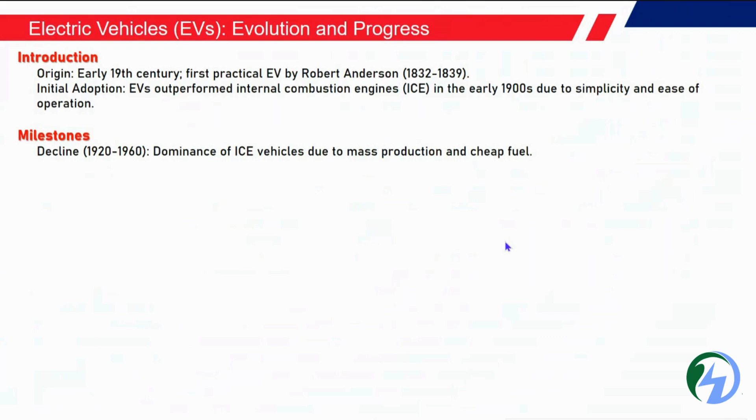It was very difficult for battery convention, and most of the investors invested their money on IC engines, the internal combustion engines, which work with fuel, the petrol and diesel combination. Later, the batteries required more and more lithium ion batteries and some nickel NiMH batteries, used for recharging.

They integrated those batteries in later stages, and some companies like Tesla made their model from 2008 to 2020, a complete EV vehicle.

It was introduced currently, and now all companies are working towards solid state batteries, because batteries are coming with solid and liquid criteria.

So how this battery's life can be expanded, and how this performance can be added to the vehicles, and how the power should be reutilized when we do acceleration or braking - it's about regenerative braking.

Currently, the companies are working on EVs. By 2030, the expected 60% should be EV vehicles, with Tesla, BYD, Nissan, and VW. Some companies started working more on EV production, and future perspective on EVs.

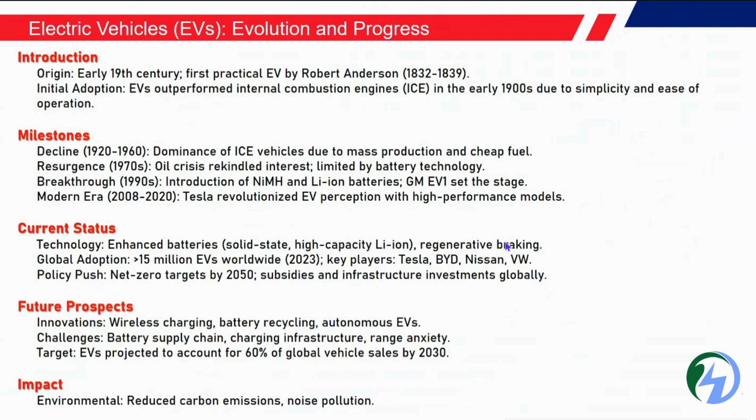And the impact of this EV will be environmental effects, like more carbon emission will be reduced and noise pollution also will be reduced once we start the EV vehicle.

And it will create good opportunities for many people, where they can work in the manufacturing area and some of the renewable energies.

So what exactly does the EV battery have inside? As I told you, the batteries have some lithium ion chemicals. Usually it will be having the lithium metal oxide, with cobalt or nickel, manganese, iron, or any other substance. It will be part of the cathode.

It will be protected with the electrolyte, covered with aluminum foil, and we have an anode, the graphite rod. The cathode and anode are separated by the plastic separator, and to protect the anode we have the copper foil. So these are the five layers where the battery will be manufactured and placed in the vehicles to make it rechargeable.

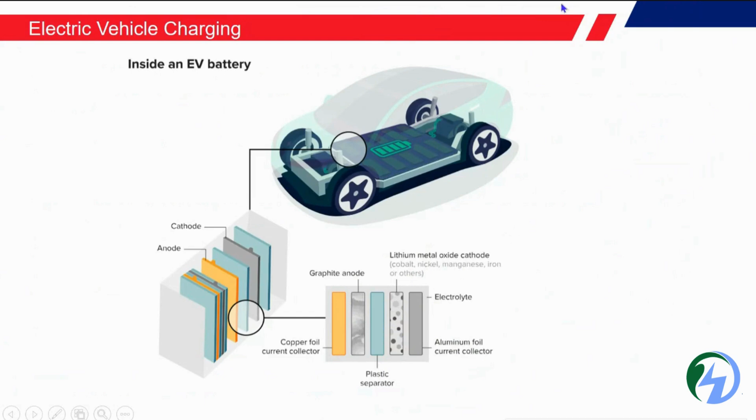And how do these vehicles recharge? Usually they have charging stations, so the vehicles will be charged from the station point.

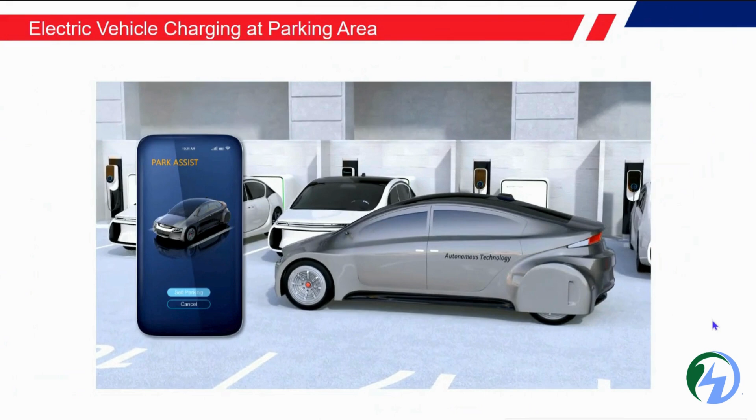And some of the areas have parking slot areas, so that it's able to monitor and observe via the mobile, how the vehicle is able to park automatically and charge. It will be a part of wireless charging, how it will be charged without wire, so that will be monitored from the mobile app. So those are some of the future technologies, whether it will be wired or wireless, so that can be tracked from the mobile.

And some of the renewable energies which play a major role are the solar system or wind panels, because the power is one main concern to charge the batteries. It should be supplied from the source. So like the natural sources, it will give a good result for the EV charging, where this will help us to charge the vehicles from the different stations.

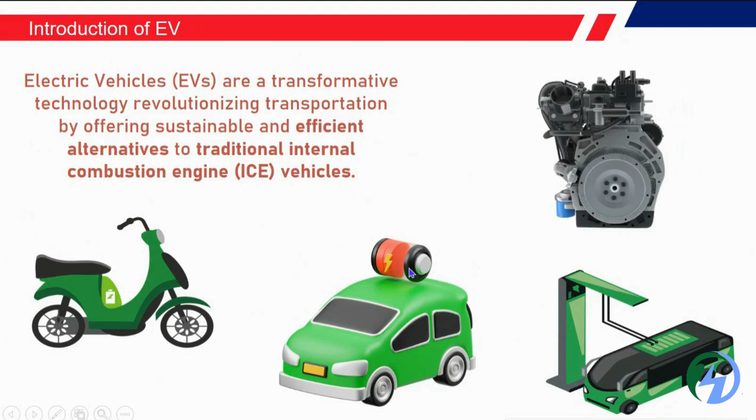So the battery always requires charging, and that will be a part of a rechargeable battery, where the power will be stored in the batteries and distributed to the wheels. So the battery is the one which will be placed as a part of the vehicle. We make it as battery packs, and this battery pack helps to drive the motors.

So we have the front traction motor, and we have the inverter, which converts AC to DC or DC to AC, depending upon the motor we use. And similarly, we have a rear traction motor with the power electronics, meaning the inverter. So we have the motor and inverter on both sides, and the battery, inverters, and motors play a major role in driving the EV.

And what is the EV powertrain? Usually the EV powertrain talks about how the power is distributed to the wheels. Here we can understand this with a car vehicle, which has four wheels. The four wheels are one part, connected to the mechanical transmission, which will be a differential.

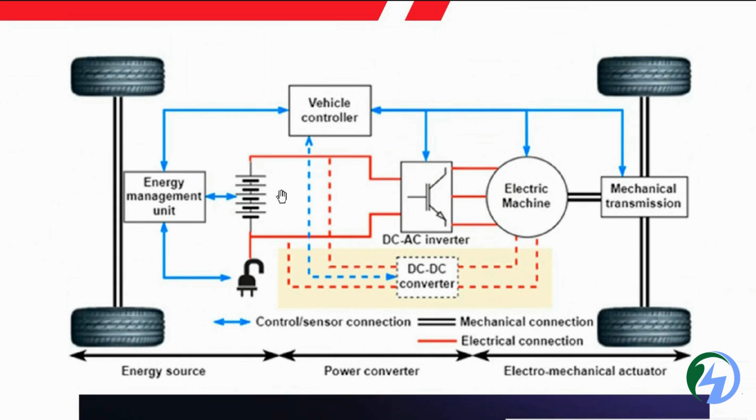The double line talks about the mechanical connection, whether the drive shaft or shaft connection, and how it is established towards the front wheels or back wheel, or towards the transmission of the drive. The red line talks about the electrical connections from the batteries and from the inverters on the electrical transmission.

So this is an overview to understand the powertrain. The batteries, inverter, and motor play a major role. EVs are mostly configured with batteries and some other fuel cells. The powertrain converts the electrical energy into mechanical energy.

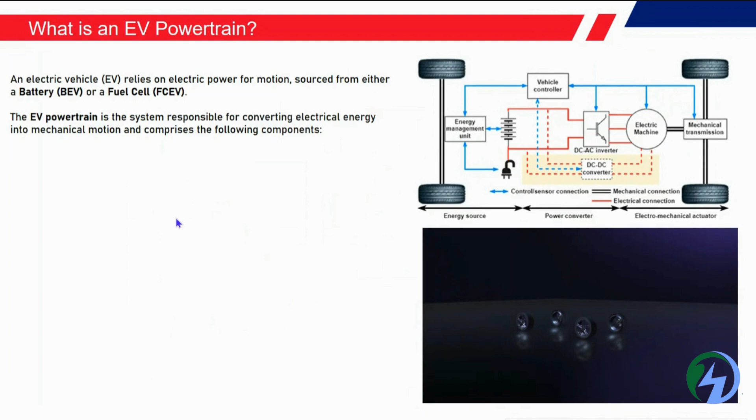The energy stored in the battery is distributed to the inverters and converters, and that energy flows to the motor. The motor converts the electrical energy to mechanical motion, which is transmitted to the wheels, generating movement.

Next are the key features to drive this. Mainly, we have the drive shaft, which helps drive the wheels from the shaft. As we know, the EV has zero emission during operation, whenever the transmission is happening from the batteries to the wheels.

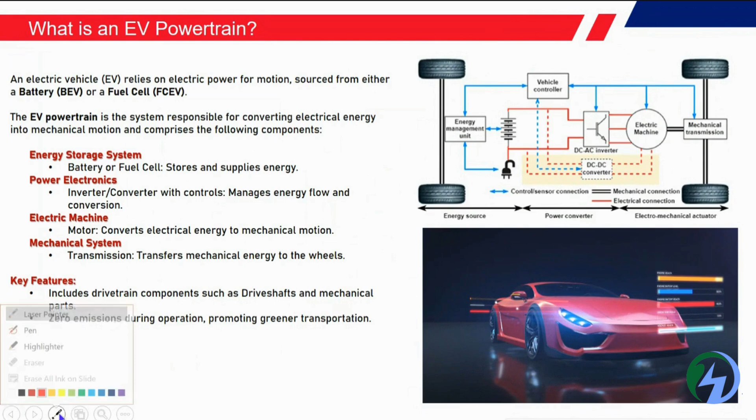All together, it will be integrated, and the powertrain works as a system. The major components are the battery pack, inverter, electric motor, and gearbox, which is required to change the set of speeds.

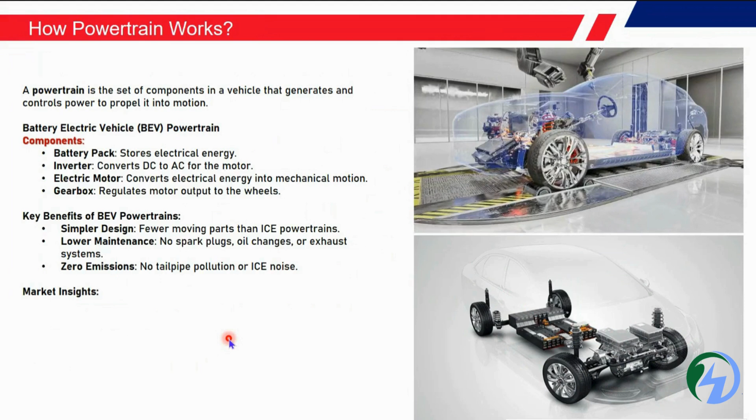Other benefits are a simple design, lower maintenance, and zero emission. As for market insight, 70% of global electric cars will be in use by 2023, and 98% of electric light commercial vehicles are moving towards EVs, resulting in good sales and market purchasing, because maintaining petrol and diesel vehicles gives pollution.

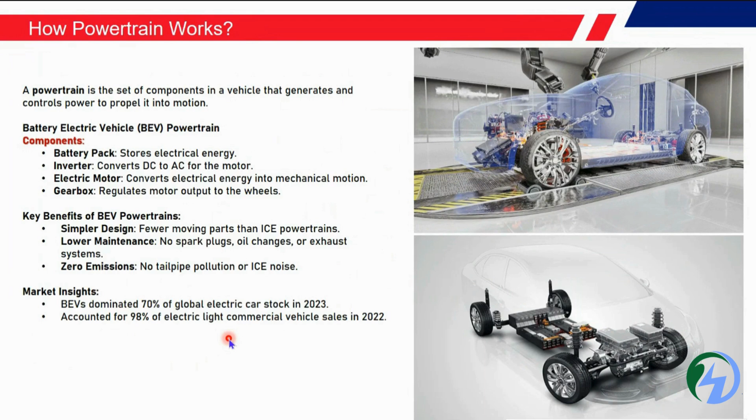This is impacting the industry, and EV charging can happen at home and in some charging stations, where it can save fuel consumption money, and the pollution won't be affected. So even IC engines are being replaced with batteries in coming days.

So why these powertrain designs? As we know, whenever we place the batteries and hardware components in the car, heating is a factor. To reduce the heat, we require some cooling, so we introduce fan components, because when vehicles run long distances, they can heat up, and performance will be reduced for the hardware or battery.

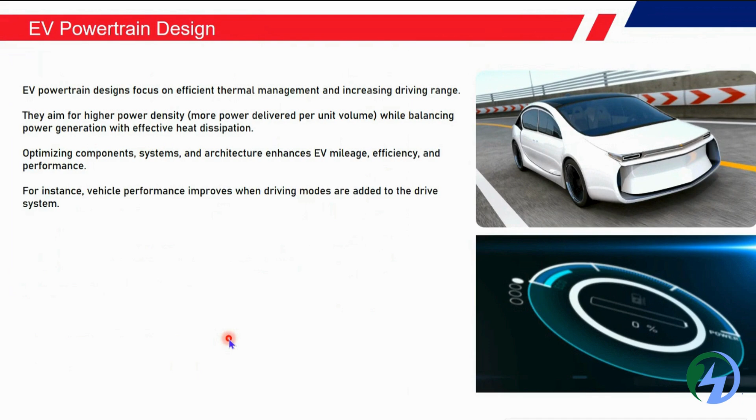To maintain good mileage and efficiency for long runs, the design towards the EV is very essential, to give good performance. It should always have a proper output when delivering towards speed and mileage, and it should have a proper response.

The functionality, whether software or hardware, should have accurate response and accurate driving results towards the battery or inverter. For future mileage, whether short or long duration, we should disable some features, because whenever certain features are not required, battery power consumption will increase more and more. So it should be avoided.

There are some enabling conditions where switches should be turned off during certain runs, so that battery power consumption is maintained efficiently during vehicle driving, and how this power will be distributed from the battery.

So mainly the power will be distributed to the motor, to the inverters, and that two inverters, like we should convert the DC to AC inverter, that will be the traction inverter. And next we have the DC to DC converter. It will convert the high voltage DC from the battery to the low voltage DC.

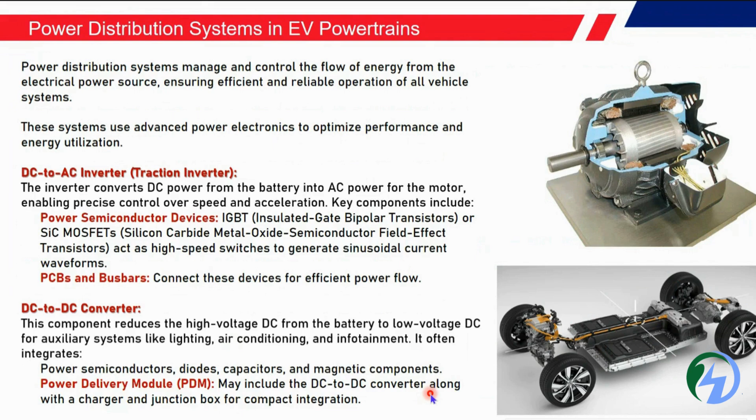And some of the vehicle control unit, like the vehicle control unit, acts as a brain, because it will coordinate with the sensors and other auxiliary modules to support. And we have a power distribution unit, the PDU, where it is connected to the switches, fuses, relays and semiconductors.

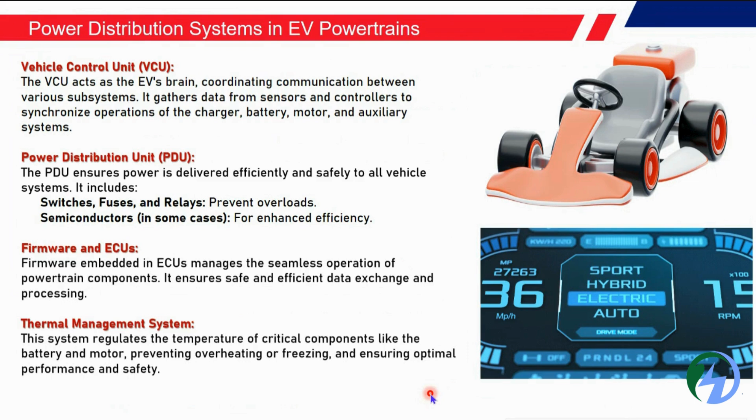Moreover, the firmware and ECUs will be part of the other ECUs where data is exchanged. And thermal management is needed because the hardware we are equipped with will get heated up. To cool this, we require the thermal management system to cool the complete batteries and hardware in the vehicle.

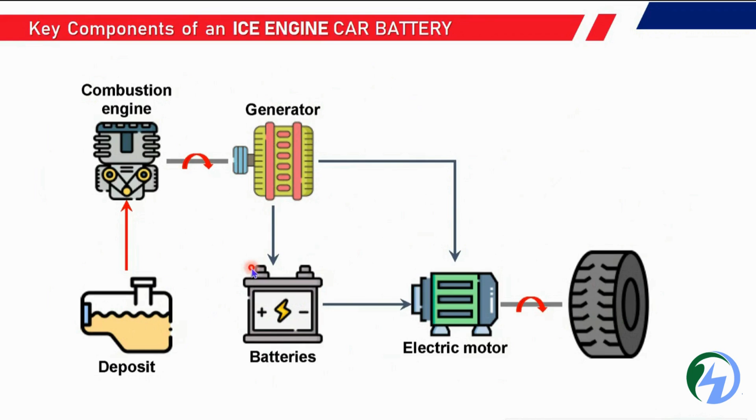The generator will supply power to the electric motor and to the batteries. So for the electric motor, sometimes we require power from the generator, and alternatively we require it from the battery, and that will rotate the wheels. So generally, this is high level information on how the IC engine has car batteries and how charging and discharging happens.

And similarly, how the electric vehicle works - all of this is based upon charging the battery. When you plug the charging plug into the car, it will be charged, and then it will be stored in the battery as DC power. Once you start the vehicle, the car system will be powered on.

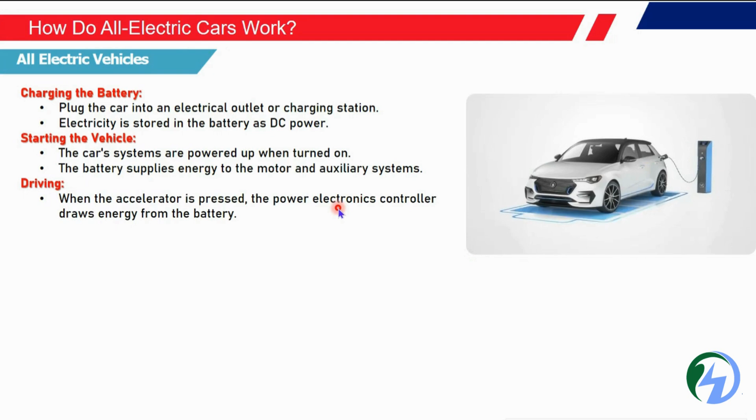The battery will supply energy to the motor with the help of the auxiliary system. So the person is able to drive, and he should press the acceleration. When he presses the acceleration, the electronics - whatever controller we have - sends information to the motor with the required speed. So that speed input and the acceleration input will be taken by the controller, and it will give it to the motor.

So whenever the motor speed increases, the consumption from the battery also increases. So it should be balanced and maintained, and that will be controlled by the microcontroller, what we call the power electronic controller. And we have some part of inverters.

So inverters convert AC to DC or DC to AC. The inverter converts DC power to AC and sends it to the motor, because our motors are AC motors. So we need to convert it, since the storage in the battery is DC power. The DC power will be converted to AC with the help of the inverters. So the motor mostly drives the wheels.

So via the transmission medium, whether forward or backward, that can happen.

In a regenerative braking system, whenever you press the brakes or during acceleration or deceleration, some force will be generated. That force cannot just be wasted, so the kinetic force should be converted into electric force and stored in the battery. That is part of regenerative braking. During acceleration or braking, the motor acts as a generator and captures the energy, because otherwise it will be lost. So it gets stored in the batteries.

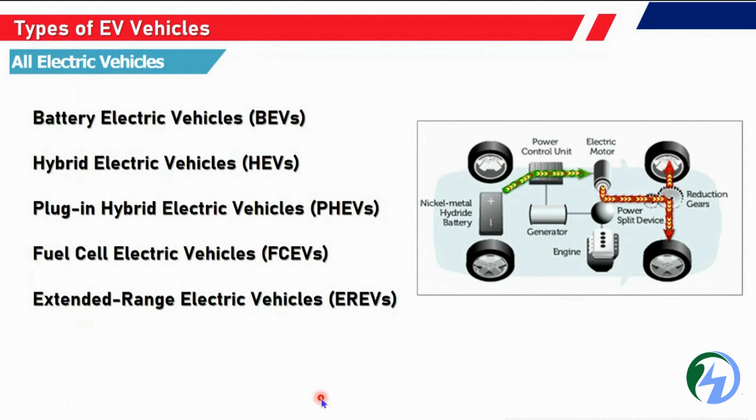The electric vehicle types are: battery electric vehicle, hybrid electric vehicle, plug-in hybrid electric vehicle, fuel cell electric vehicle, and extended range electric vehicle. These are the different types of vehicles available in the market, and they are emerging with few more, adding new technologies for EV vehicles. So the first step is to understand about the battery electric vehicle.

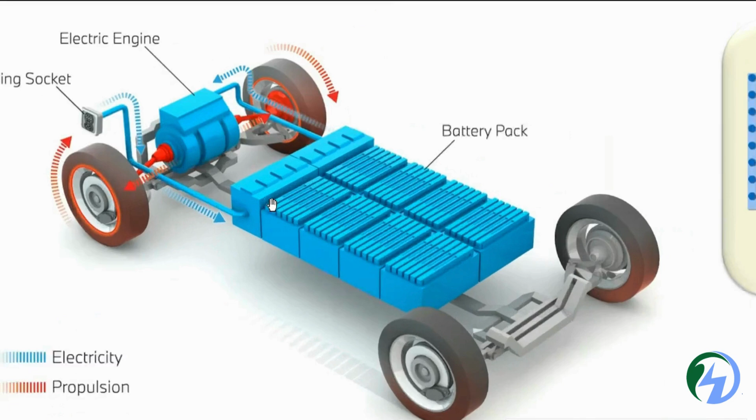Generally, the battery electric vehicle consists of only the battery system. The battery is packed all together, and we have the motor, which makes the wheels rotate. The motor is directly plugged in, so the motor starts rotating. Similarly, to charge the batteries, we have the charging socket.

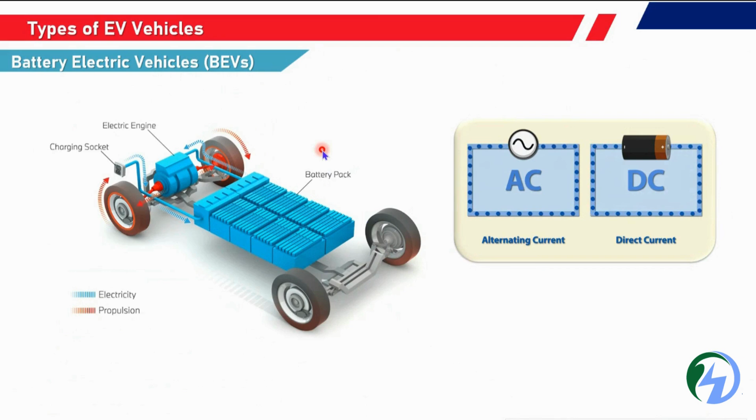With the help of that, it will be charged. To charge these batteries, we have the alternate options, part of an AC charger or a DC charger. So there are different ways of charging, which we will understand in the coming slides.

Usually the electric vehicle has batteries, an onboard charger, a transmission, a converter, and a power electronic controller, meaning the hardware which controls all the sensor inputs and outputs. For the controller and inverters to cool, we have the thermal cooling system, which cools the components available here, such as the batteries, motors, or inverters.

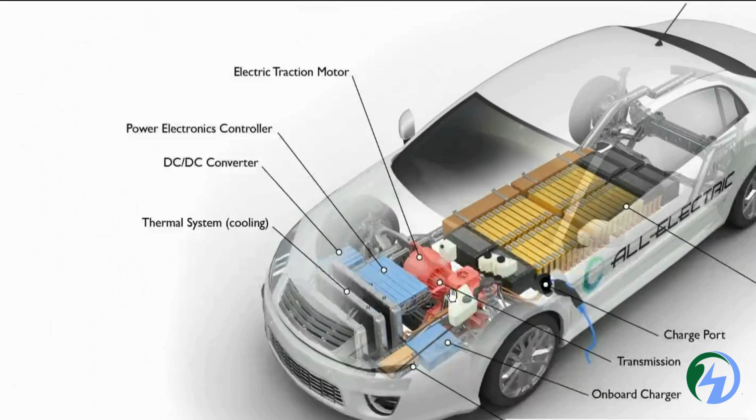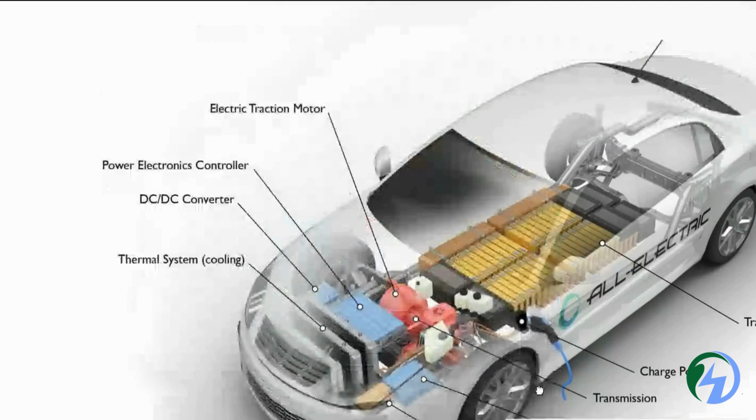So the major factor here is that we should have the proper battery package. To charge this battery, we have a charging port, and from the batteries the power will be distributed via the transmission, through the traction motor and some of the inverters. The power controller plays the major role in managing the inputs and outputs, and the thermal system helps with cooling the system.

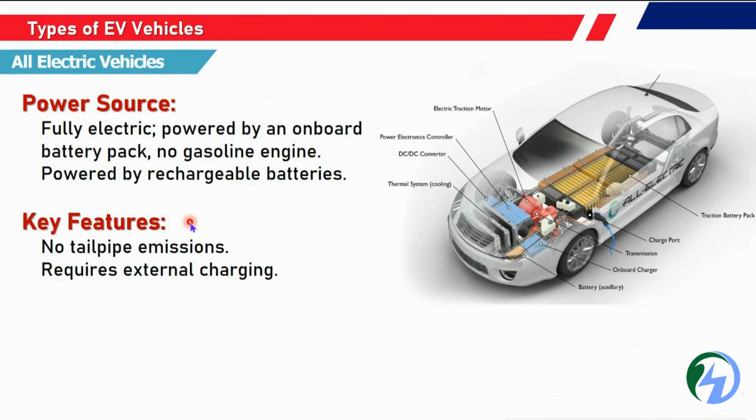So mainly, an EV is fully electric, with no gasoline or other engines, and it has rechargeable batteries requiring only external charging. Some example cars are the Tesla model, Nissan, and Chevrolet.

And we have the plug-in hybrid electric vehicle. This means it additionally has a fuel supply, so it is a combination of two sources: one from the battery, and the other from the fuel. For the fuel, we have the chamber, and we have the charging port to charge the batteries.

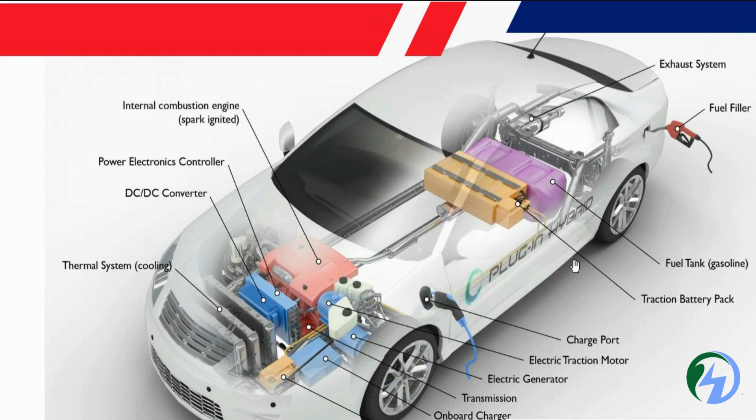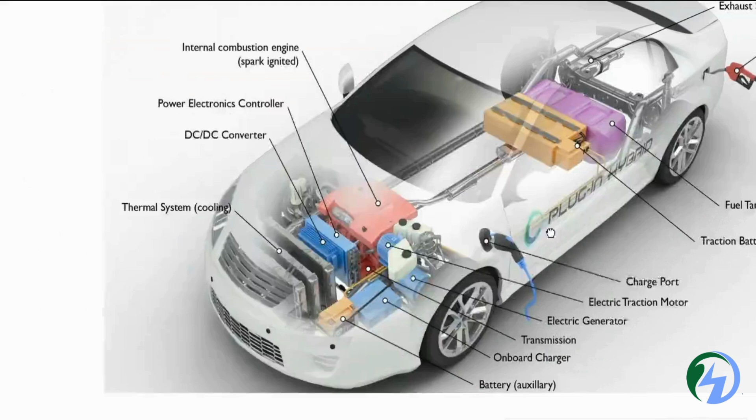So here we have two slots: one is the battery, and the other is the fuel tank. Whether it is petrol or diesel, anything, it comes under the gasoline part, or LPG, anything - it comes under the fuel tank plus batteries. So you have to fill the tank, and you also have the traction battery pack, which is charged via the charging port.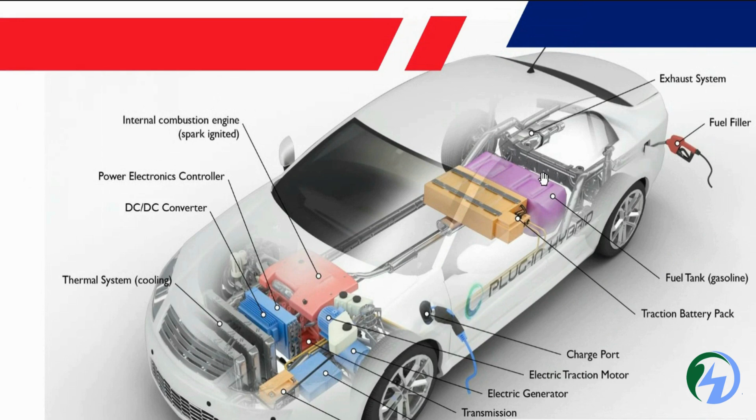We have the electric motor, electric generator, transmission, onboard charger, batteries, thermal cooling, and DC DC converter. We are using more batteries to run the vehicle, directly converting electrical to mechanical energy using the battery. For fuel, to convert liquid energy into motion, we require the engine, like an IC engine, which converts fuel energy into mechanical energy, and mechanical into electrical energy with the help of the internal combustion engine.

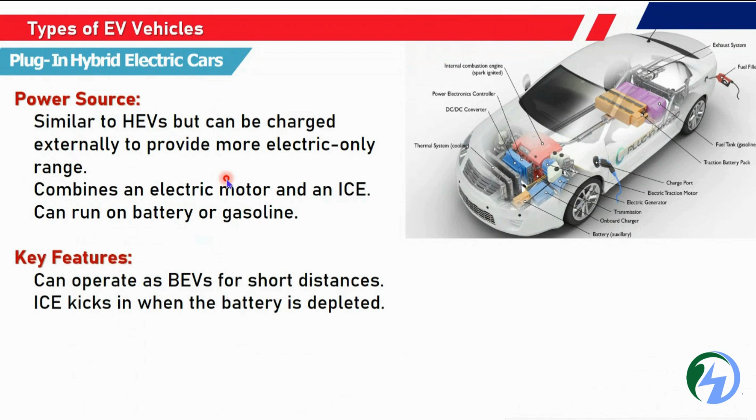So how does plug-in hybrid work? Mainly it is similar to the hybrid EV, but it can be charged externally. We can provide additional fuel or liquids. It is a combination of both hybrid sources, like motor plus IC or motor plus gasoline. Any combination is possible, but it should have both sources. It is able to operate short distance on batteries, and the remaining distance via fuel. It is a combination of both, with a certain range where each source is used. If one is absent, the other can be utilized. This is a feature of some cars like Toyota and Mitsubishi Outlander.

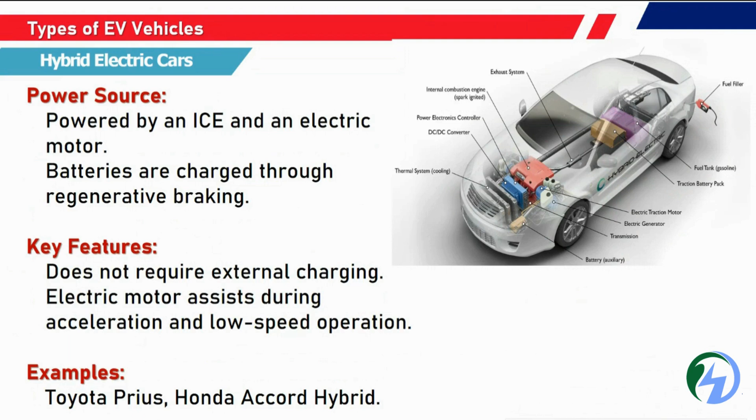Hybrid electric vehicle is part of the same family. We have the fuel tank with gasoline, a fuel filler, the IC engine, and the exhaust system, same as before. It is a combination of both, but here we don't have a charging point like the plug-in hybrid. You have the fuel tank, so once filled, the batteries will be charged during the regenerative braking system, meaning during acceleration and braking. It doesn't require any external charging. The electric motor will assist during acceleration and low speed operation. Examples of this are Toyota and Honda.

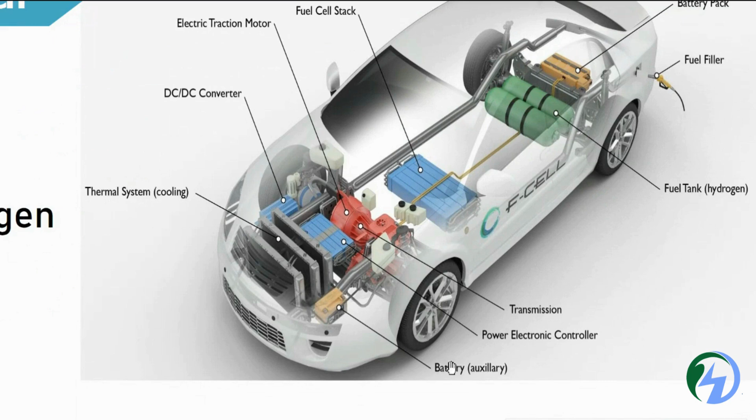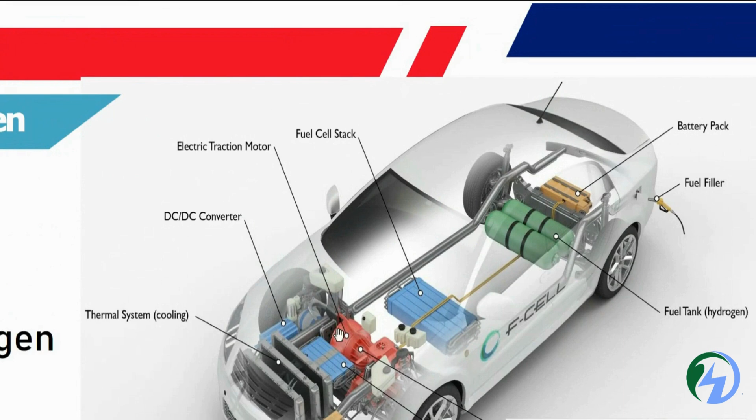Fuel cell electric vehicles: here the fuel cell is nothing but hydrogen tanks. The fuel is filled with hydrogen, and we have a fuel cell stack, meaning we don't have a complete battery, but it runs with the help of hydrogen. The batteries are used as a source for lighting or some additional features. We have the transmission and power electronic controller, the battery package, fuel cell tank, electric traction motor, DC DC converter, and thermal system for cooling purposes.

Mostly this fuel cell is used to generate electricity, and it is emission free, but it depends upon the hydrogen infrastructure, because making hydrogen gas is very difficult. The emission during the vehicle run is only water vapor in the long run, but it's limited by the hydrogen refueling infrastructure. Toyota and Honda, among other companies, have started working on hydrogen.

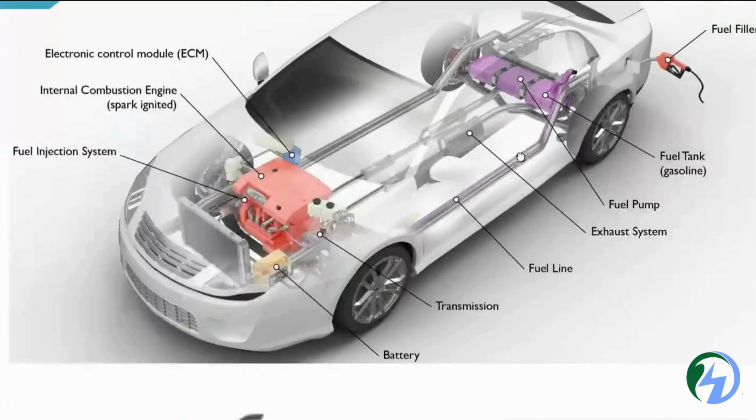We have the extended range electric vehicle, part of the EREVs. It has a gasoline generator and battery, along with a fuel pump, fuel tank, fuel line, transmission, battery, electronic control modules, and IC engine. Here it is a combination of a small IC engine and a generator. The IC engine is not connected to the drivetrain directly, but charges the battery, acting like a generator. Whenever you start your vehicle, the generator automatically charges the batteries, and that charge is utilized for the next usage when driving.

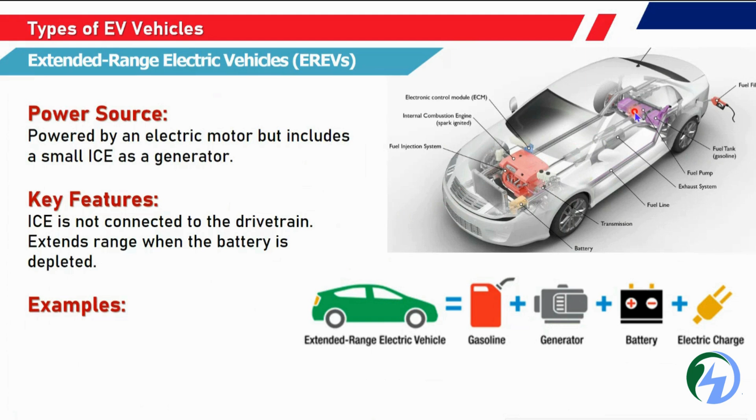Some of the BMW and old Chevrolet cars started working on this. How do these vehicles run when generating power? Generally, as shown in the image, we have a fuel tank. From the fuel tank, the liquid fuel is supplied to the engine, and from the internal combustion engine, the power is distributed.

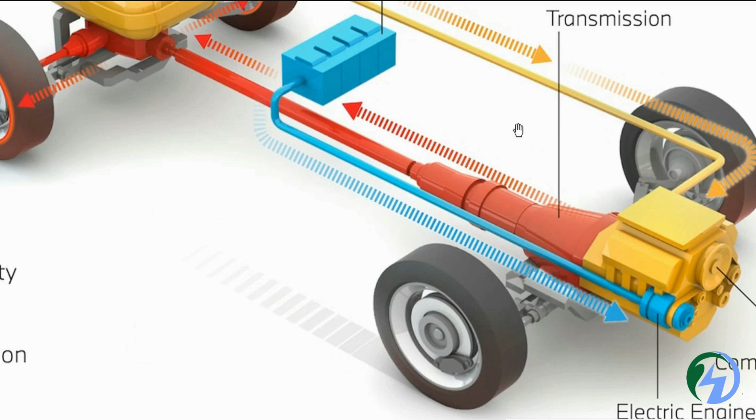This is the transmission part where the gear shifts determine the speed, which will be transmitted to the drive shaft. From the drive shaft, we have the differential. From the differential, the wheels start rotating, whether forward, backward, or reverse.

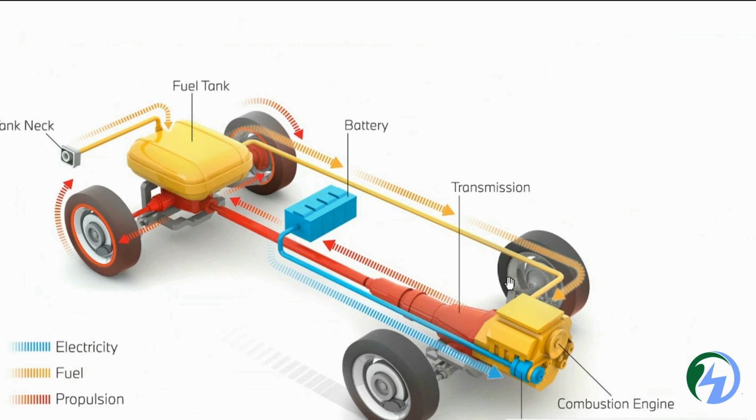Specifically, for filling fuel we have a fuel tank neck, so this is about the fuel combination. Similarly, to start this IC engine, we have a battery, which is connected directly to the combustion engine. In between, we have other equipment that gets rotated.

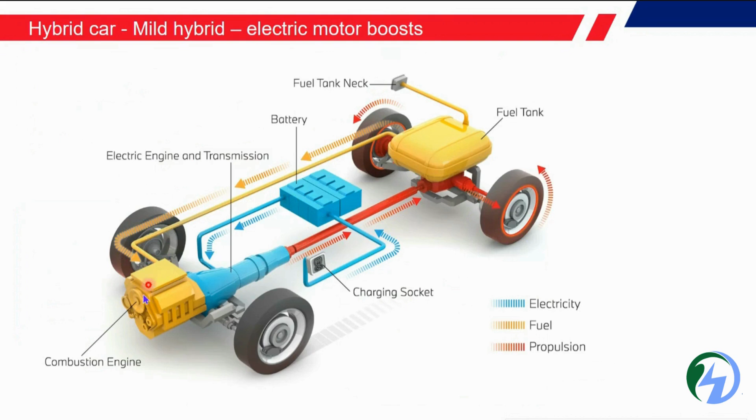Apart from the batteries and fuel tanks, the other part of mild hybrid vehicles is the propulsion system. Previously we had no charging, only a fuel tank, but here we specifically have a charging socket and fuel combined. Similarly, we have the engine, which is a high engine with some limited features.

To understand battery electric vehicles: they run entirely on electricity without using any gasoline, generally powered by large batteries. Battery electric vehicles have driving ranges from 300 plus miles, and some new models are reaching even higher as battery technology improves. The only thing is, they require less maintenance than gas, diesel, or petrol engine vehicles.

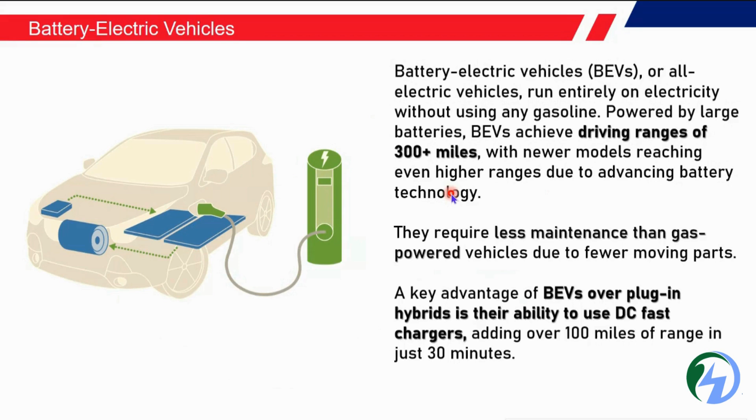Gasoline vehicles, combined with hybrid technology, mostly require less occupancy. The hybrid power we make for the electric vehicle requires some mileage, like 20-55 mileage added at one extent when filled with gasoline. On the other side, we have an IC engine.

The engine depends upon the fuel you utilize, and it has some limitation of mileage. Both ways, the electric range, whatever the mileage or distance, will be decided by the power it is utilizing by the wheels.

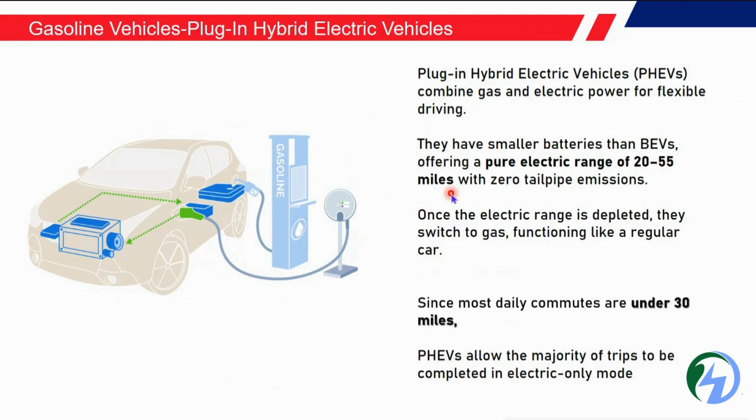Most plug-in hybrid vehicles are majorly increasing nowadays. Coming to the hydrogen fuel cell, it requires a combination of the motor and inverter, which play a major role. To rotate the motor and inverter, we require power, which is supplied from the hydrogen gas.

The cells combine hydrogen gas from the vehicle's tank with oxygen from the air to produce electricity. Here we term this as FCEV, a fuel cell electric vehicle.

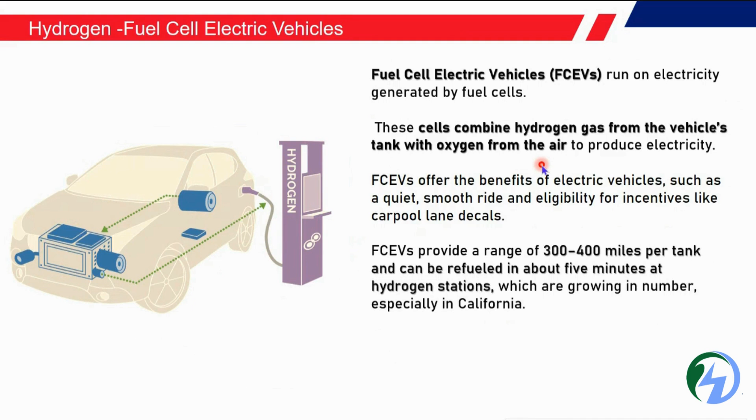It is beneficial for electric vehicles, giving a smooth ride and good for zero pollution. Hydrogen vehicles also give good mileage, 300 to 400 miles per tank, and refueling can be done in a very short time, within 5 minutes you can fill the hydrogen. The utilization of hydrogen gas vehicles is drastically increasing nowadays.

What are the fundamental parts of an electric vehicle? The main components are: traction battery package, DC-DC converter, electrical motor, power inverter, charging port, onboard charger, and controller, which is the microcontroller or ECU, and auxiliary batteries, thermal system, and transmission. We will understand these components in detail going forward.

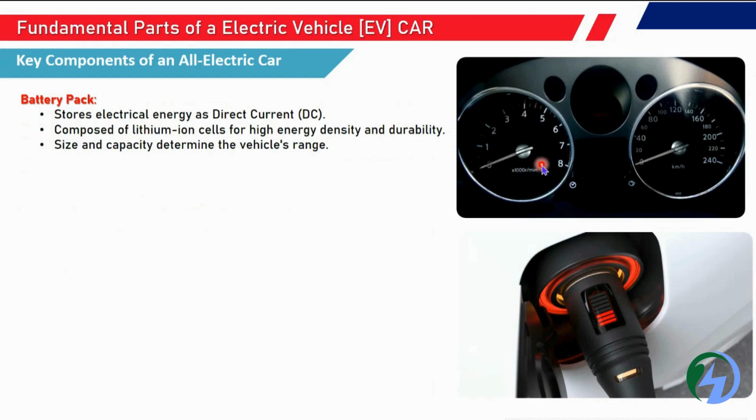The major part is the battery package, which stores DC current, direct current. It gives efficiency and good mileage to the vehicle, depending upon the size and capacity. The electrical motor is the one which converts electrical energy to mechanical energy to drive the wheels, and there are different types of electric motors.

We have synchronous motors like permanent magnetic synchronous motor, induction motor, and brushless DC motor. So inverters just convert the DC power to AC power for the electrical motors, and it will regulate the speed and torque.

The power electronic control module is a hardware and software combination where it will manage the energy flow between the batteries and the motor, and ensures that during acceleration, how the speed should be controlled or maintained, so that it will be balanced with the help of the power control module.

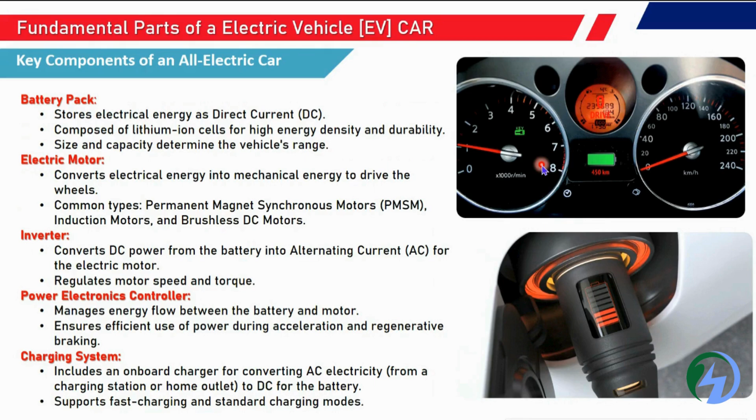The charging system includes an onboard charger for converting AC from charging stations or home outlets to DC for the batteries. Whatever power we receive at home is AC, and that should be converted to DC. The charger should supply the DC efficiently. In charging systems, we have fast charging and slow charging, depending on the mode we choose.

Apart from that, we need a thermal management system for cooling of the batteries and other components, and a regenerative braking system. Whatever motion means kinetic energy during motion, it will capture the kinetic energy during braking and convert this motion into electrical energy to recharge the battery.

Transmission is where we are shifting speed depending on the gear. We have a simple single speed gearbox, and direct driven types like automatic and manual. Manual means we need to operate the gear changes individually, and automatic depends on the acceleration, the speed, and road condition, where gears will automatically be shifted and transmitted.

We have a charging port, which is the interface that connects the car to external power sources.

We have an auxiliary system. Auxiliary systems are for externally supplying power, like inside or outside the car, for exterior and interior lighting, sunroof, and some additional features. This just requires some battery, which is the auxiliary battery system - the secondary battery, as we usually say.

So we'll discuss in detail about those components.

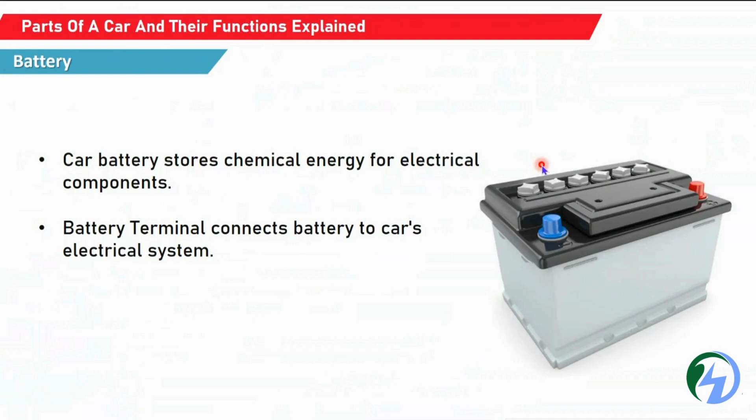Battery is the one that stores chemical energy for electrical components. Batteries have terminals, the anode and cathode, and with the help of that, we are able to connect those battery terminals to the car. It contains packs - you have the positive and negative terminals, the anode and cathode, as we say. These are interlinked with all and packed together.

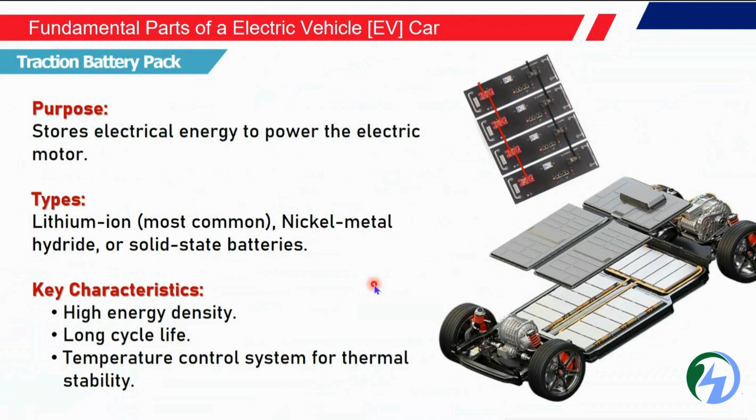We say that is a traction battery pack, and it stores the energy. Batteries can be lithium ion battery, nickel metal hydride, or solid state batteries - different variants. The main factor is high energy density and long cycle - we can recycle it multiple times - and it has a temperature control system for thermal stability.

What is this traction battery pack? It stores energy and generates power to the motors, and whatever power it stores is in the form of DC current. This DC depends upon the current storage, and the capacity will be decided - it will be measured in kilowatt-hours.

Mostly the batteries are designed specifically based on mileage - if charged one time, it gives 200 kilometers. Similarly, it has some lifespan where it will be charged around 2 lakh miles, and the battery can survive. After that, the lifespan will be reduced, meaning it will give less mileage. It depends - that will be part of each component, and it has specific mileage.

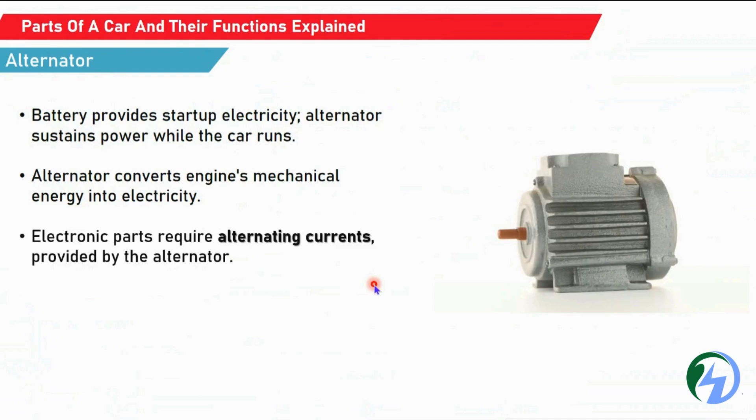We also have specifically the alternator, which converts mechanical energy to electrical energy. And moreover, the electric traction motor's main purpose is converting electrical energy into mechanical energy. We have different types of motors like brushless motor, brushed motor, and AC induction motor, and it has high torque and high efficiency.

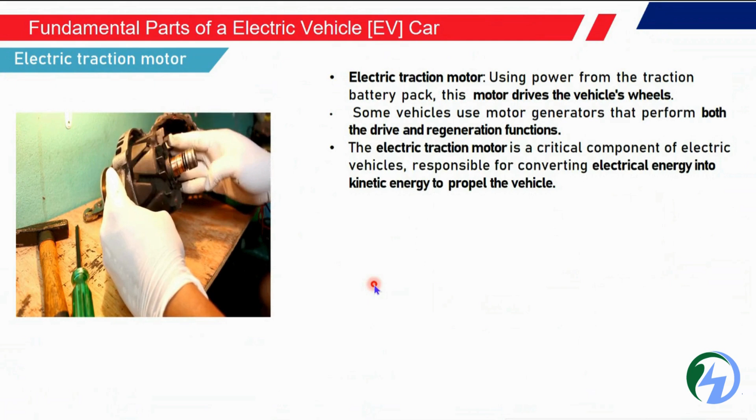This electrical motor is operated for driving the vehicle wheels, used for drive as well as regenerative functions. With the help of this traction motor, we are able to reproduce power during the acceleration or braking condition.

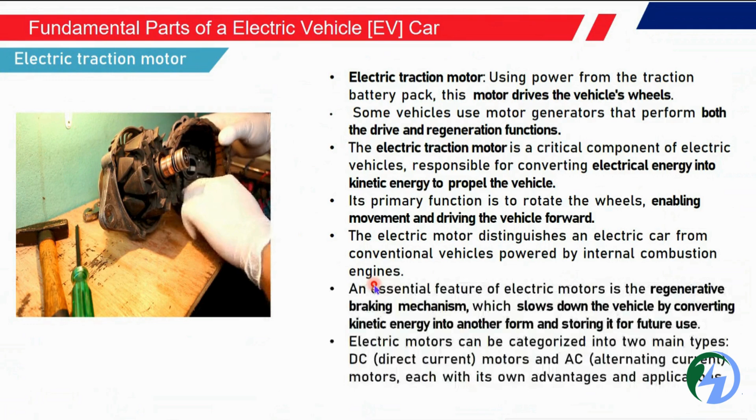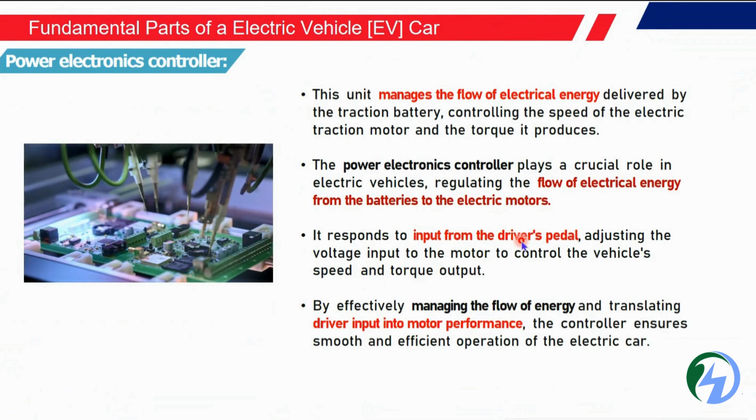Next we have the power electronics controller, where power is distributed to the motor. It manages the flow of electric energy from the batteries to the motor, and its main function is to regulate motor speed and torque conversion. It manages the flow of electrical energy from the batteries to the electric motor with respect to the inputs from the pedal or acceleration, so the acceleration or speed is managed by the power electronic control.

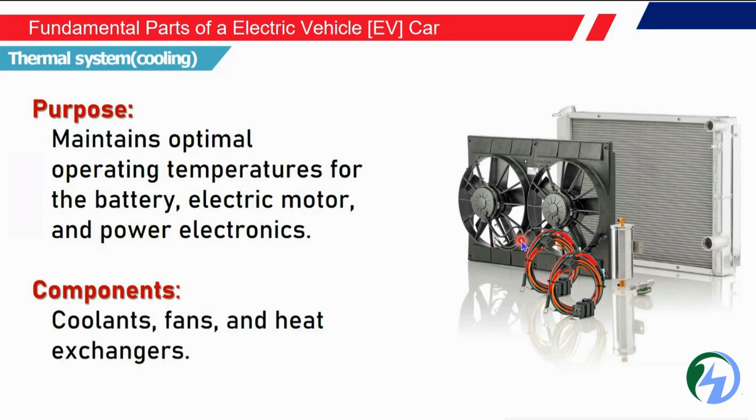The hardware components get heated up. To cool this, we have the thermal system, which we call cooling. It helps cool the batteries, motors, and other electric components using coolant, fans, and heat exchangers. It mainly maintains proper operating conditions with respect to different rotations or conditions, keeping a normal temperature in all states.

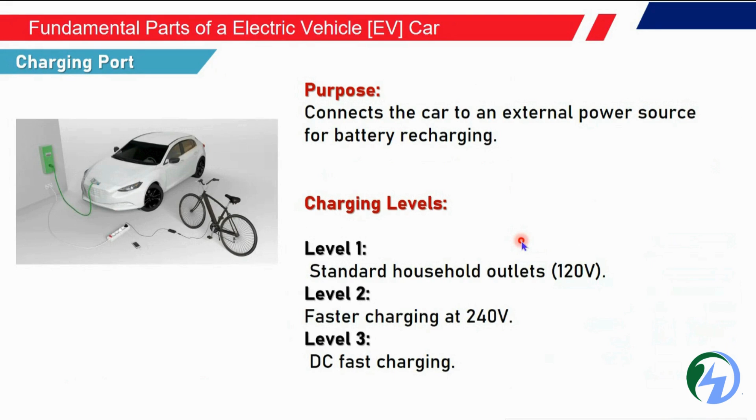Next is the charging port, which is specifically for giving power to the batteries. We have charging levels: level one, level two, and level three. Level one is household charging at about 120 volts. Level two is fast charging at 240 volts. Level three is DC charging. These are the three types of charging levels we have.

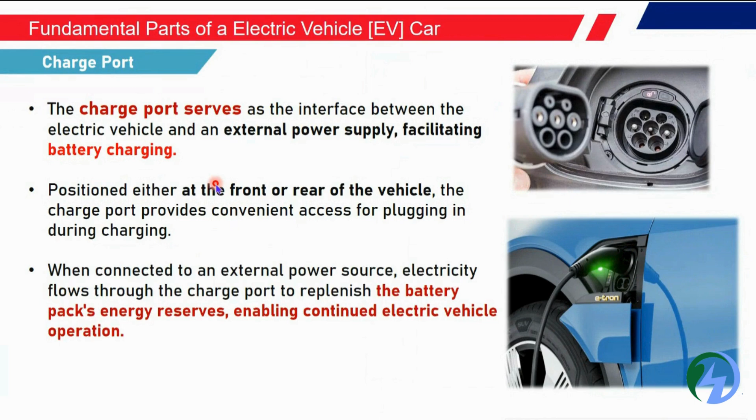Charging ports generally have pins. We can see neutral, PP, and CP pins, like L1 and N, L2, L3, which form the port configuration. The pin should be mapped to the connector for the vehicle to charge. Whenever the vehicle is charging, you get a light indication. Depending on the vehicle, the charging port may be positioned at the front, back, or side.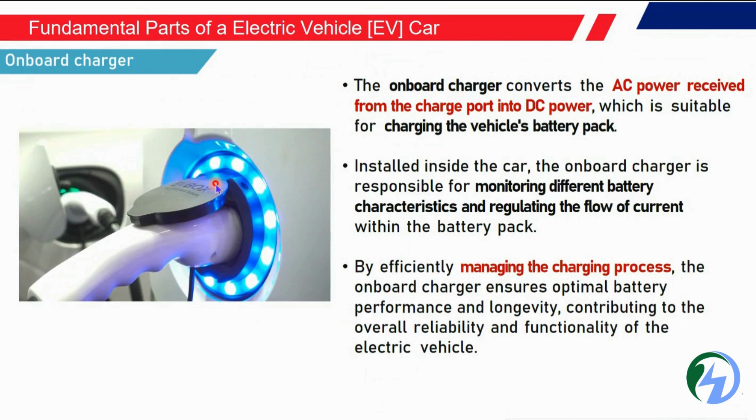Onboard charging converts AC power from the grid to DC power, and this current flows to the battery packs where it is saved under different conditions. It maintains the proper charging process, which is forward charging only; it won't have reverse charging.

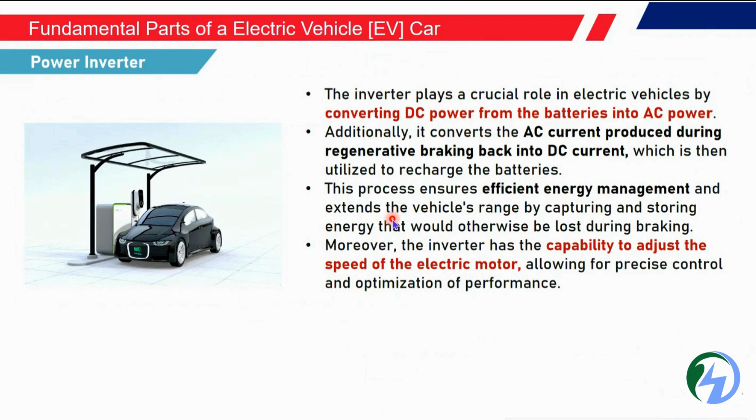We have a power inverter, which converts DC power from the battery to AC power for the motors, and also converts AC to DC during the regenerative braking system. The power inverter converts DC power from the batteries to AC, and is also able to handle power produced from regenerative braking, while maintaining constant speed during acceleration for both slow and high speed vehicles.

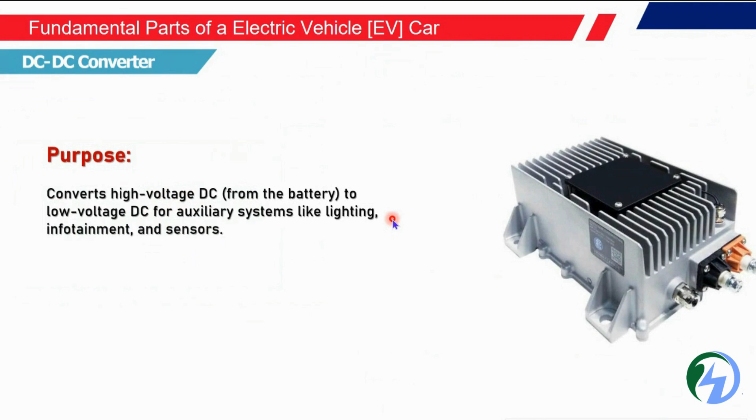We also have converters, which convert high voltage to low voltage DC for things like lighting, infotainment, and sensors. This conversion maintains different voltages under different conditions.

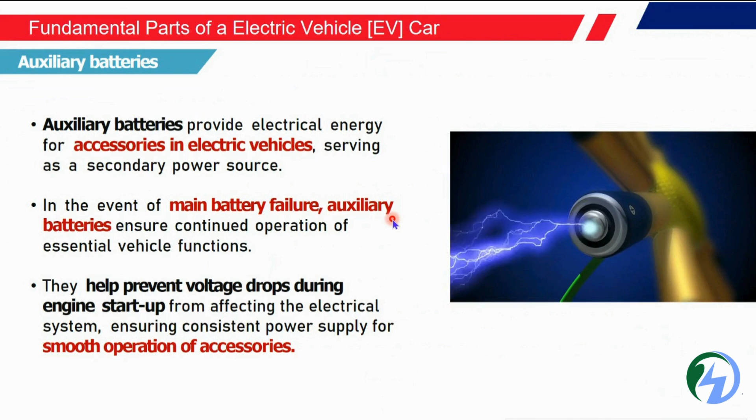Next we have auxiliaries. Auxiliary batteries are the secondary batteries. Their main purpose is that if the primary battery fails, the secondary battery continues operation for the vehicle, and it helps prevent a high voltage drop during engine startup, helping smooth driving operation.

The braking system is part of recapturing the kinetic energy during braking. It converts mechanical energy into electrical energy, which is then stored in the batteries.

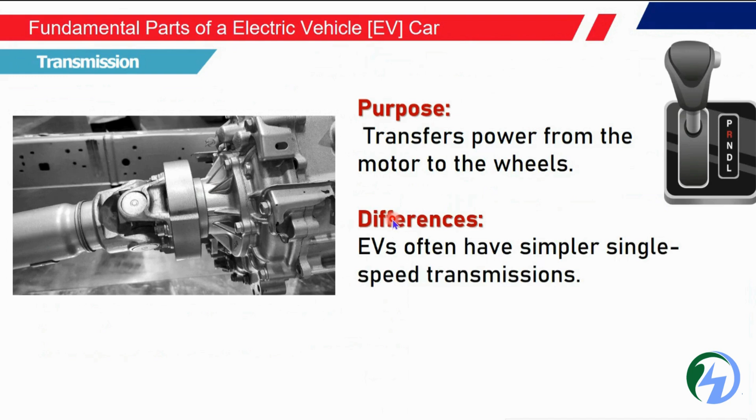The transmission supplies power to the wheels. During gear changes, with respect to forward or backward movement, the transmission plays a major role in the vehicle. Usually IC engines or EV engines have a single transmission, not a dual transmission, maintained together with respect to gear changes, and we have automatic and manual changes.

The traction motor and the transmission - in EVs we usually have the batteries and the ECU that is connected, and we have the motor gear system. For the IC engine, the transmission happens with respect to the shifting of gears. It is part of a parallel hybrid unit.

There are two types of motors in the EV: we have AC motors, which include synchronous brushless motors and asynchronous induction machines. We also have the gearbox and transmission - as we know, manual and automatic gearboxes.

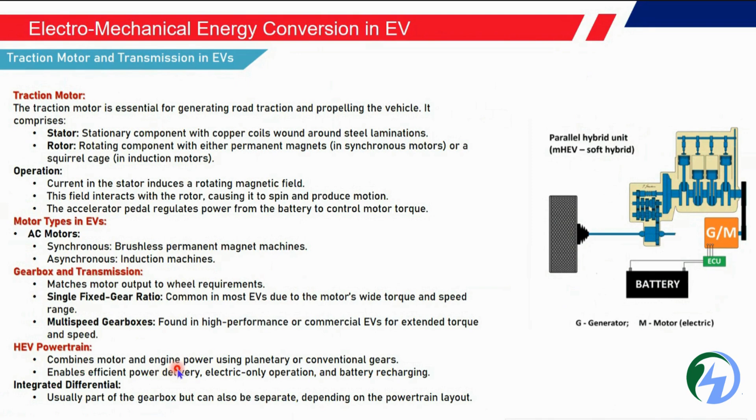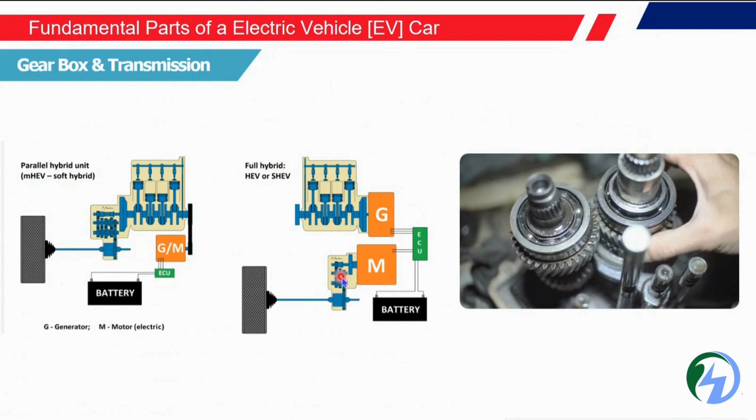The HEV powertrain has a combination of motor and engine, specifically parallel hybrid and fully hybrid types. It will be clear that whenever gear changes happen, the shifting or speed changes occur, and that power is distributed to the wheels.

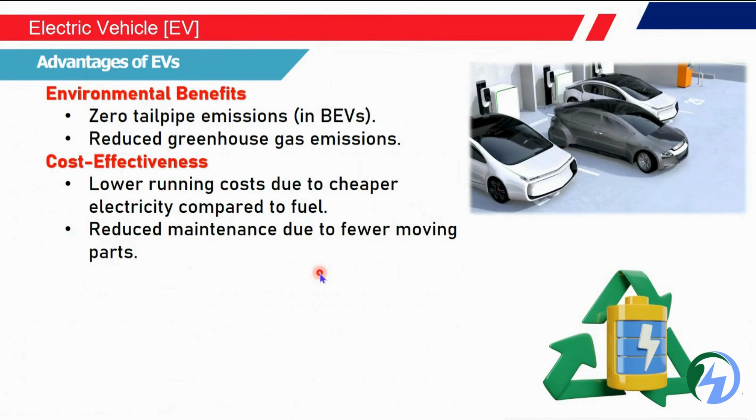What are the advantages of EV? Environmental benefits include zero emission and reduced greenhouse gas emission. Cost-wise, there's lower running cost due to cheaper electricity compared to fuel, and reduced maintenance due to fewer moving parts - less maintenance for the motor, injector, and batteries - compared to IC engines which have more components.

Performance-wise, the torque provides quick acceleration and a smooth driving experience. Energy completely depends upon the battery or the gases which we use.

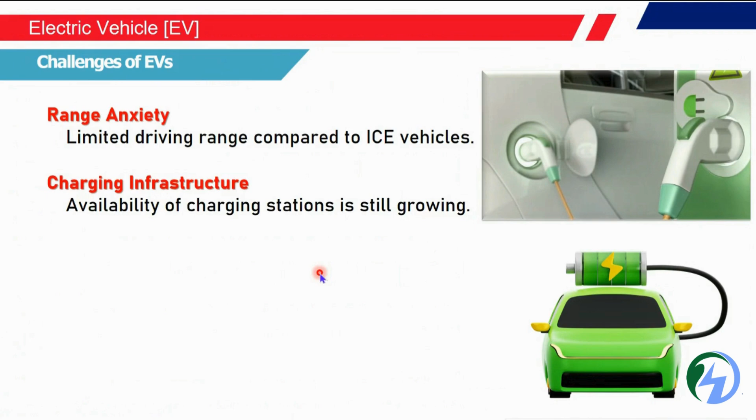Challenges for EV: range is limited compared to IC vehicles, and charging stations are still very few, though that should grow. Cost-wise, some EV vehicles are higher cost compared to a normal budget, because battery prices are increasing more and more, and that impact adds to making EV vehicle prices higher.

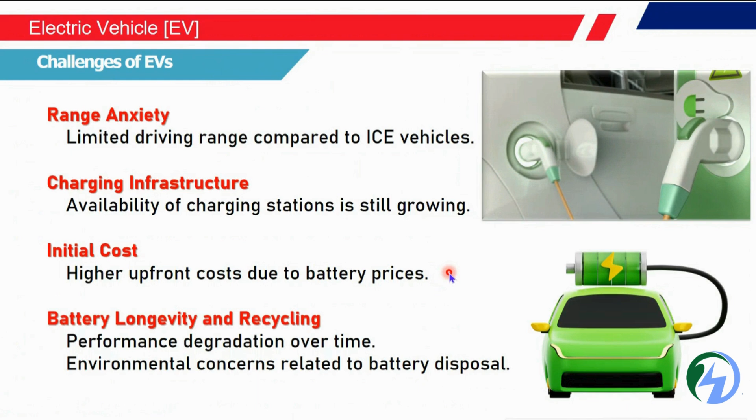Battery longevity and recycling is also a challenge - the battery's lifespan reduces when used for multiple times and multiple recycles. This is one impact. Moreover, once these batteries' usage is completed, they create environmental issues, which should be avoided.

Charging technologies: we have AC chargers and DC chargers generally. L1 at 120 volts is slow charging from the standard home outlet, suitable for overnight charging, and it won't impact much on the range. L2 at 240 volts is faster charging, with dedicated chargers at home and public chargers - this is fast charging. We also have rapid charging stations for quickly refilling.

We have Tesla's supercharger, where the charging is faster, and within minutes of time the vehicle will be charged up.

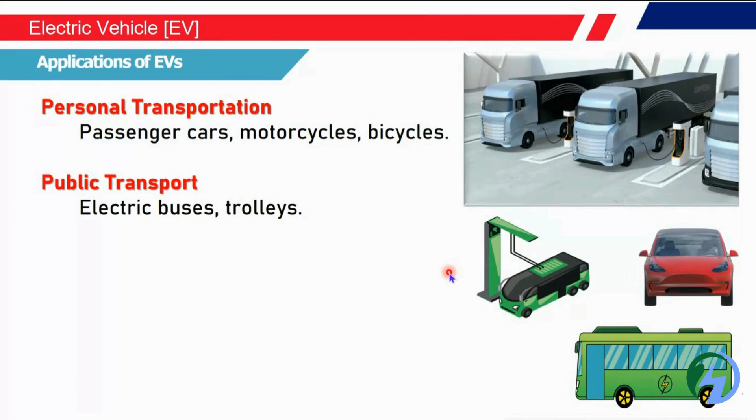What are the applications of EV? Transportation vehicles - passenger cars and motorcycles and bikes are coming up with EV. Public transport includes electric buses and trolleys, commercial vehicles include delivery vans and electric trucks, and special purpose vehicles like forklifts and airport ground support equipment are all coming up with EVs.

The future of EV will involve technology advancement and mostly autonomous vehicles. Government policies are also supporting this - for some electric vehicle purchases, the government is giving subsidies for customers.

These vehicles' power is integrating with renewable energy like solar and wind energy, from where the power will be collected, and from the charging station, vehicle-to-grid technology will be supported more - these are the improving areas, along with the improvement in structure like expansion of charging stations and moving towards wireless charging.